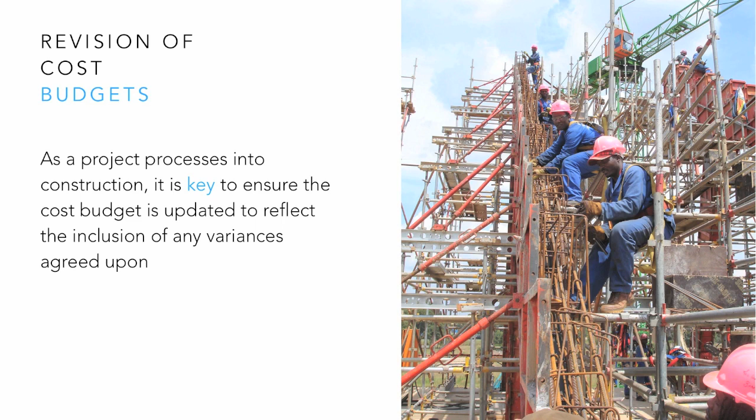Management of budgets throughout the project. Once work commences on site, whether by contract, purchase order, or through internal wages, costs associated with the activities become commitments, or committed funds. Finally, as invoices are received for work, funds need to be tracked differently again. In a budget, these are spent costs or expense costs. Management of this phase of estimating and cost control is covered in the next module.

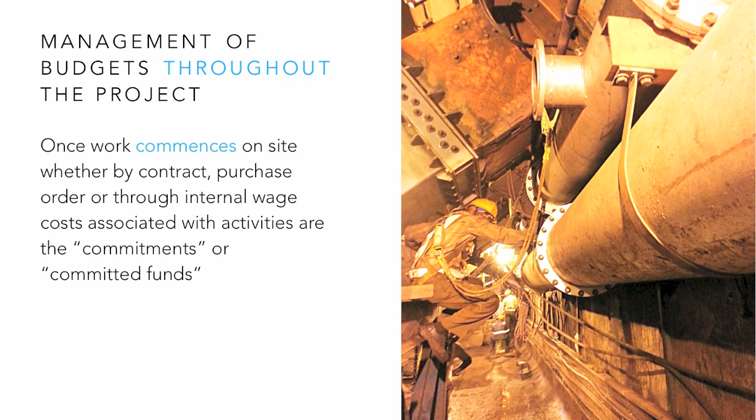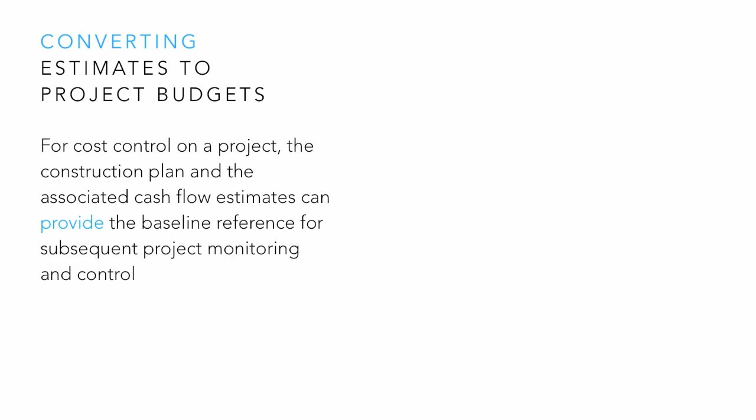Converting estimates to project budgets. For cost control on a project, the construction plan and the associated cash flow estimates can provide the baseline reference for subsequent project monitoring and control. For schedules, progress on individual activities and the achievement of milestone completions can be compared with the project schedule to monitor the progress of activities.

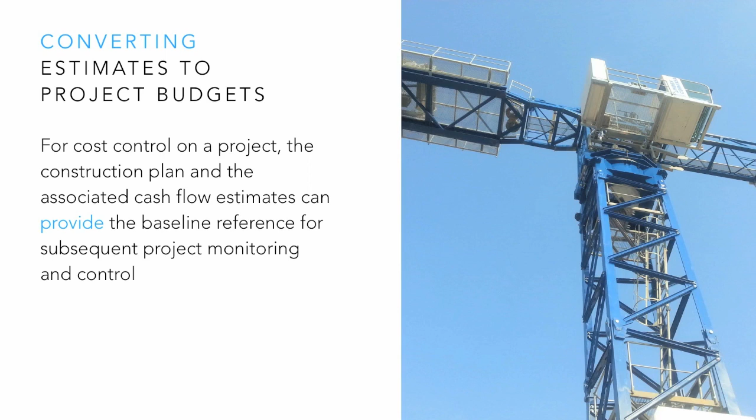Contract and job specifications provide the criteria by which to assess and assure the required quality of construction. The final or detailed cost estimate provides a baseline for the assessment of financial performance during the project. To the extent that costs are within the detailed cost estimate, then the project is thought to be under financial control. Overruns in particular cost categories signal the possibility of problems and give an indication of exactly what problems are being encountered.

Expense-orientated construction planning and control focuses upon the categories included in the final cost estimation. This focus is particularly relevant for projects with few activities and considerable repetition, such as grading and paving roadways. For control and monitoring purposes, the original detailed cost estimate is typically converted to a project budget, and the project budget is used subsequently as a guide for management.

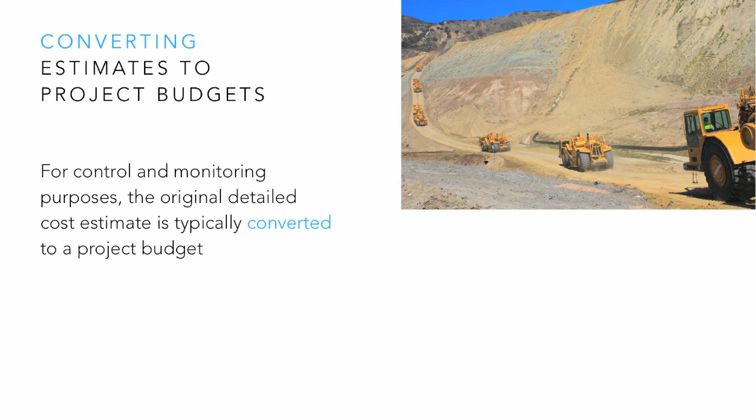Specific items in the detailed cost estimate become job cost elements. Expenses incurred during the course of a project are recorded in specific job cost accounts to be compared with the original cost estimates in each category. Thus, individual job cost accounts generally represent the basic unit for cost control. Alternatively, job cost accounts may be disaggregated or divided into work elements which are related to both particular scheduled activities and to particular cost accounts.

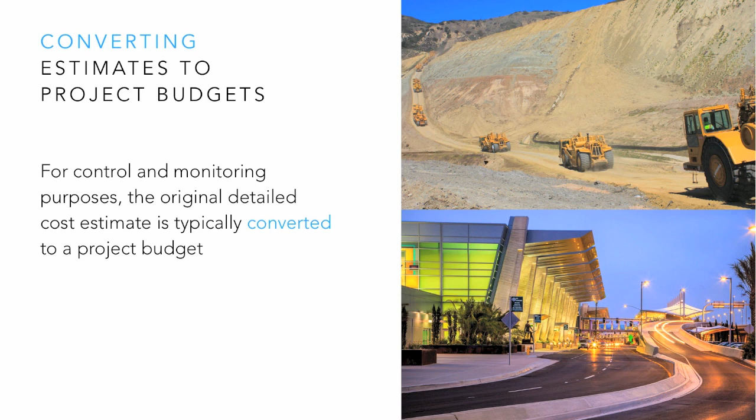In addition to cost amounts, information on material quantities and labour inputs within each job account are also typically retained in the project budget. With this information, actual materials usage and labour employed can be compared to the expected requirements. As a result, cost overruns or savings on particular items can be identified as due to changes in unit prices, labour productivity, or in the amount of material consumed.

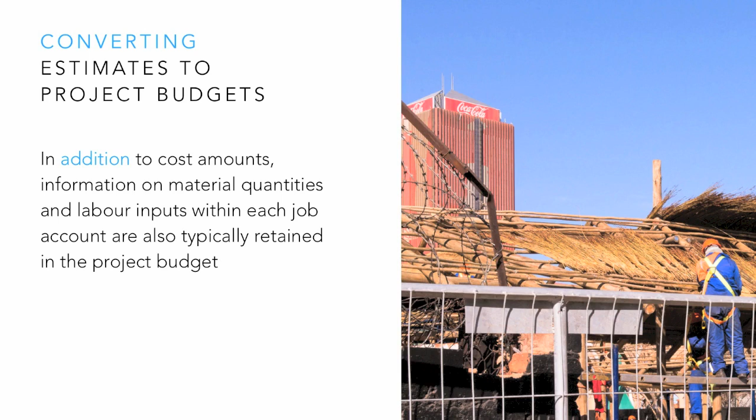The number of cost accounts associated with a particular project can vary considerably. For constructors, on the order of 400 separate cost accounts may be used on a small project. These accounts record all the transactions associated with a project. Thus, separate accounts might exist for different types of materials, equipment use, payroll, project office, etc. An example of a subdivision of cost codes is detailed as follows.

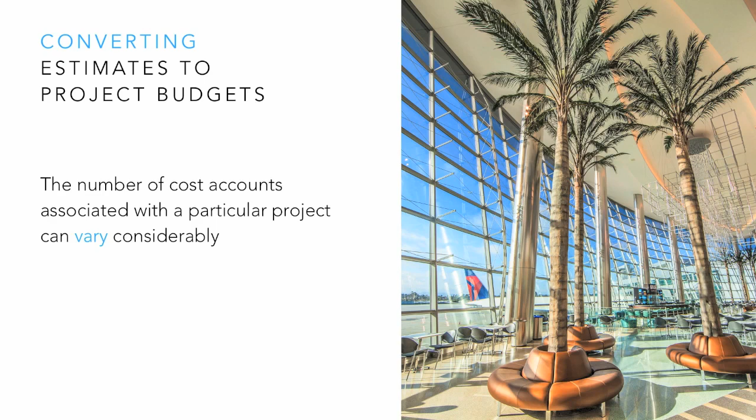In developing or implementing a system of cost accounts, an appropriate numbering or coding system is essential to facilitate communication of information and proper aggregation of cost information. Particular cost accounts are used to indicate the expenditures associated with specific projects and to indicate expenditures on particular items throughout an organisation.

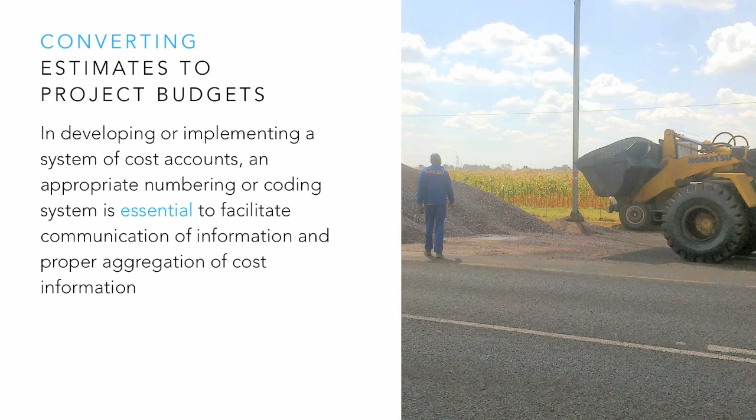Converting a final cost estimate into a project budget compatible with an organisation's cost accounts is not always a straightforward task. Cost estimates are generally disaggregated into appropriate functional or resource-based project categories. For example, labour and material quantities might be included for each of several physical components of a project.

For cost accounting purposes, labour and material quantities are aggregated by type, no matter for which physical component they are employed. For example, particular types of workers or materials might be used on numerous different physical components of a facility. Moreover, the categories of cost accounts established within an organisation may bear little resemblance to the quantities included in a final cost estimate.

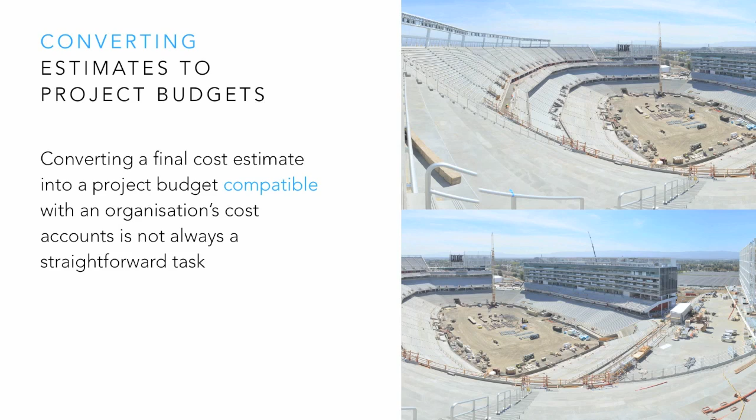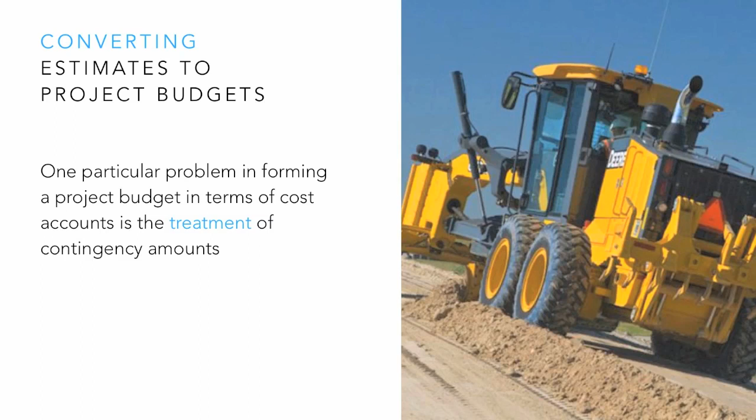One particular problem in forming a project budget in terms of cost accounts is the treatment of contingency amounts. These allowances are included in project cost estimates to accommodate unforeseen events and the resulting costs. However, in advance of project completion, the source of contingency expenses is not known. Realistically, a budget accounting item for contingency allowance should be established whenever a contingency amount was included in the final cost estimate.

A second problem in forming a project budget is the treatment of inflation. Typically, final cost estimates are formed in terms of real dollars, and an item reflecting inflation costs is added on as a percentage or lump sum. This inflation allowance would then be allocated to individual cost items in relation to the actual expected inflation over the period for which costs will be incurred.